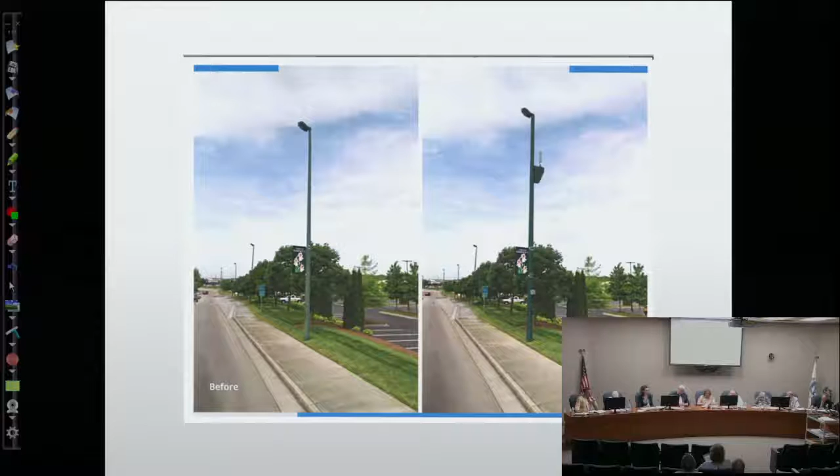Since the meeting, the application, as you may recall, was denied because it was incomplete. That was conveyed to the applicant, and they have provided supplemental information for the Parkside Drive location. This is roughly near the eastern access into the Best Buy shopping center on Parkside Drive, approximately where this is located.

There's a rendering up on the screen of what the pole looks like right now. It's a light pole, and they will be taking that down and replacing it, similar to what Zayo did a couple years ago with some poles on Parkside Drive and Campbell Station, or Campbell Lakes Drive, putting in their small cell structure and antenna.

About a third of the way down, you can see it on the right. The reason it has to protrude away from the pole is because the light is at the top.

The original design for their freestanding pole, which was going to be separate from our light pole, was a more stealth structure at the top of the pole, kind of a cylinder. It blended in and looked like just a pole without anything on it.

But we recommended they consolidate the poles out there because what they had proposed was just a few feet east of this light pole, and it would have had two large poles pretty close together. Staff felt it was more visually appealing to have an antenna that protrudes out, but only one pole instead of two poles in the general area.

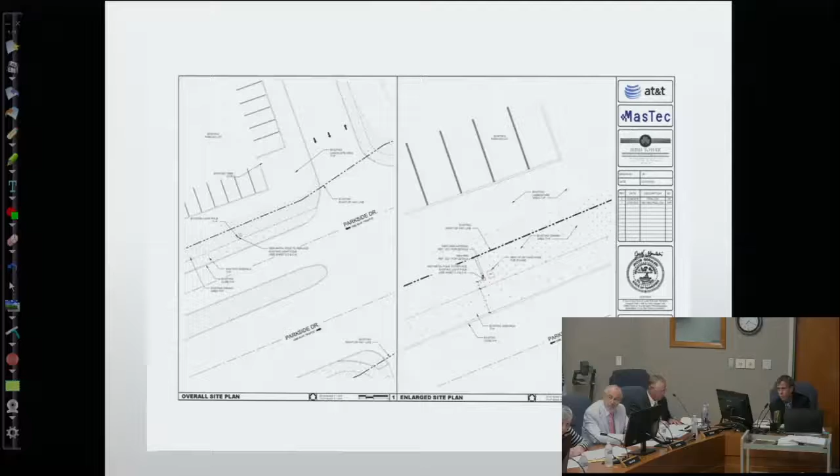They mentioned in communication back to you about the Heron Road location. Any more insight into what they're going to do there, or when? I haven't heard anything definitive yet.

They possibly will, if they have something, it could be out at Parkside Drive, kind of like we had originally recommended and asked them to consider, but until we see it, I don't really know for sure. And you don't have any kind of date? No, other than what I sent in that email, that's all I've received on that particular location.

So anyone interested in that can keep watch on the Farragut website for when that might come back again. Item number 8, discussion and public hearing on amendment to the C-1 mixed-use town center portion of the Farragut zoning ordinance as applied to drive-throughs, and—oh, I'm sorry.

Skip some. Yeah, I skipped one here. Yeah, I marked it off in a hurry.

Discussion and public hearing on a site plan for the drive-through lane and building exterior modification at the ORNL Federal Credit Union, 11405 Municipal Center Drive, 1 acre zone C-1, MUTC Design Collaborative applicant.

I'll let the applicant go through what they're requesting, but just to give you an overview, ORNL is updating their branches in the Knoxville region to reflect their new prototype, and this involves some exterior modifications, which is what's being presented to you all this evening. They also will have a lot of interior modifications that our codes guys will be reviewing.

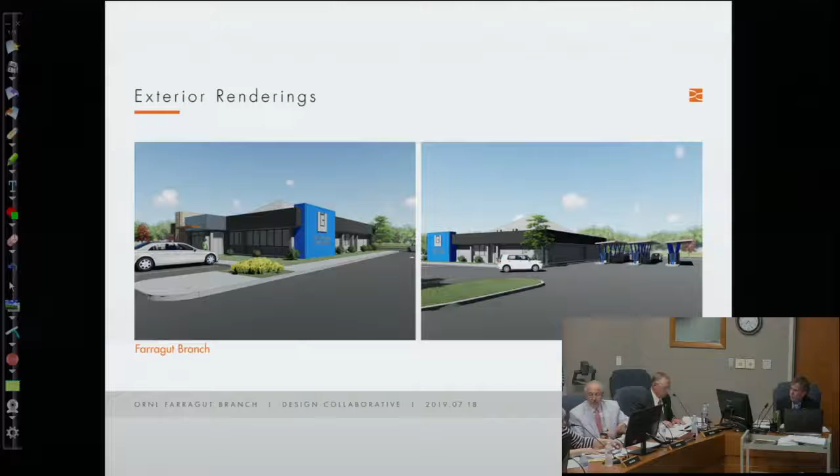That's just staff's recommendation on that. I think the applicant's probably trying to draw attention to it to a certain extent for the customers. Yeah, I feel like we're being overly restrictive when we don't need to be. We're trying to encourage business, and this feels like an unnecessary restriction to me.

The restriction is just on the drive-through, though. Yeah. And again, you really can't see it from anywhere unless you turn in, because there is shrubbery that blocks it out front. It is hidden fairly well from public streets. Yeah, definitely. Which is good.

That's surely a more muted color than what the picture is. Yeah, when you hold it up, that doesn't surprise me. It's darker. Noah, do you have any comments on it?

I think they have earned the right through grandfathering to continue the use of the drive-throughs. The blue is reflected on the drive-throughs as well as kind of an anchor point where their signage is proposed. I have a real heartburn over this due to the fact that this is our MUTC.

This is not something that we're approving on Outlet Drive or out on Kingston Pike and West Farragut. This was an area that we designated a number of years ago to try to set a tone, and we've held some other folks' feet to the fire within the MUTC regarding colors, both on some renovations over at West End Avenue as well as the new Starbucks. And quite frankly, I think with this particular building, we're going a little bit in the wrong direction. It does have some red brick.

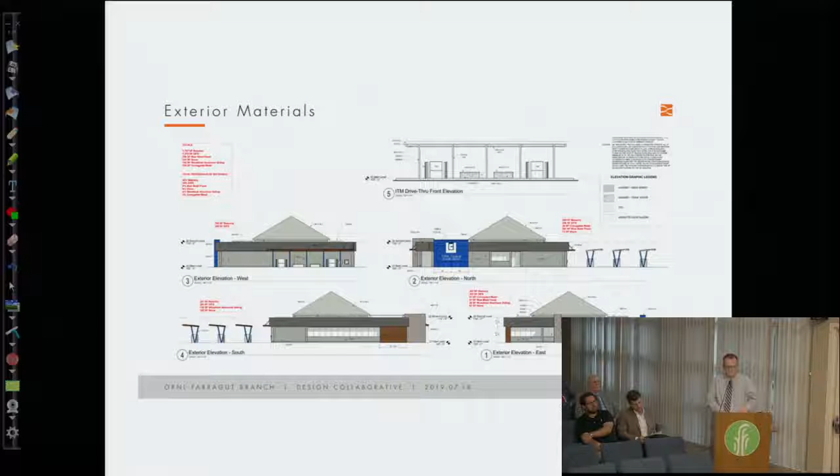And they're actually photos. Would it help if I turned the light off? It might help the audience too. No, it's hard for me to see that. Yeah, that's a lot better. Yeah, see more of that. It's a very bright blue. I mean, it really is.

Mark, do we have a blue in our architectural design that's more muted than that? Yeah, we have other choices. Are you aware of the colors we do have in our architectural design? Yes, and through discussions with Mark and a colleague of mine...

This is what ORNL Federal Credit Union has used. This is pretty much their corporate color, and it's very similar to one of the blues within the approved list of colors. So that's really why we're seeking to present this in front of you and have approval for using this color.

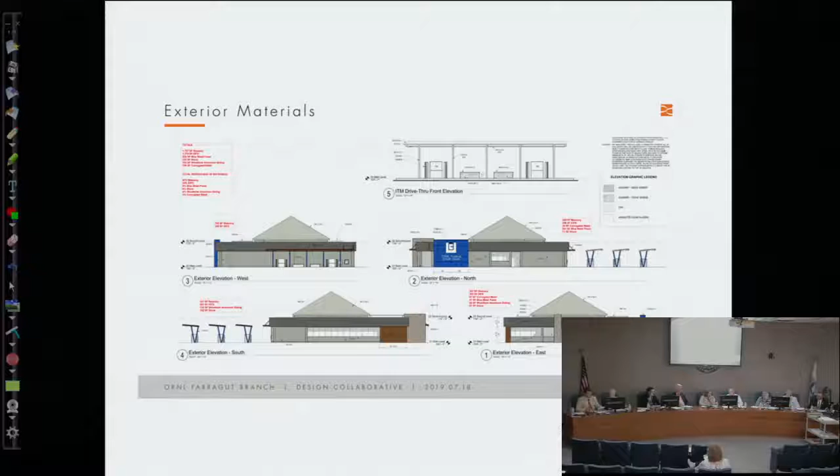By the way, the dialysis building has bright blue awnings. That's grandfathered in, well before we ever had the MUTC or the architectural design standards. I think this right elevation, the one shown here, is that facing south, facing Municipal Center Drive? Yep.

This is something this planning commission has struggled with, and I understand philosophically where everybody's coming from. If we have a problem with our architectural design standards, I think we should change it for everybody. Colors has been a big issue, and we can think back to some projects over the years that are the reason why we have the kind of color wheel we deal with today. My thought is we've got to be consistent going forward. This is a reputational thing the town has struggled with for many years, treating one developer or applicant one way and another way differently.

When this conversation started, Mark, I think I heard you say the opposition was to the blue on the drive-through because we did not want to accentuate drive-throughs. Now we're talking about the blue, period. I was talking about making all of it blue from the very beginning, not just the drive-throughs. Well, that's our prerogative to discuss it. I was just giving you the staff's position, because I think certainly drive-throughs should be de-emphasized in this part of the town. And I can agree with that, that's where I was coming from. The blue is pretty bright.

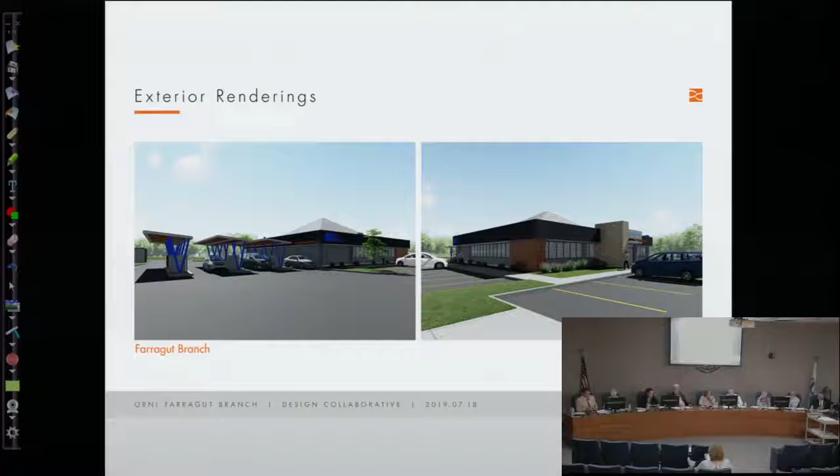I've seen it on actual sites, I did go out and look at a couple, and it's a bright, kind of glossy blue. I'm fine with the blue within their signage allowance. They have some blue on their sign now, they updated it a number of years ago, and within the allocation they have for their signage allowance, I'm fine with that. But to me, the whole blue block on the corner of this building is a sign, which is not within the allowance they would have for the number of square feet for a sign. It's out of character and definitely out of place for the MUTC.

I agree with Noah, we just can't make exceptions, and like Ed said, the next person that comes in, we have to uphold our ordinance. Well, maybe as a compromise, if you could box in the allocated sign area, you might get a fair amount of that square area that would be blue background, and it would be part of your sign.

Would they be eligible for the length of the building just on Municipal Center, but also the length of the building that faces the driveway? No, they would not take just the benefit of all the square footage. It would be based on the building width on which the sign is to be mounted, plus they could do the ground-mounted sign like they have.

I think there's some ways architecturally they could take that blue and create something where they define a picture frame within that box and then run their blue within that box. Obviously it's not going to be exactly what you're used to in your corporate identity, but what we're really hoping is that we can come up with a compromise that your board, your members, as well as the architect and other folks in charge, are happy with, as well as something reasonably consistent with our architectural design standards, the MUTC, and how we've treated applicants in the past, and hopefully we'll treat them the same in the future.

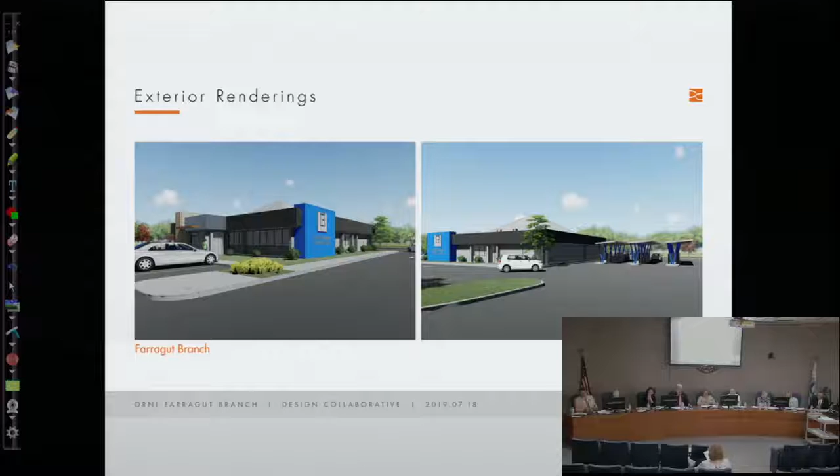So as mentioned before, with the pictures of the other locations that had multiple blue walls, we've really considered this location and some of your concerns beforehand, and reduced that quite a bit by having one wall, not nearly as large as other locations.

I think this is something they'd like to maintain to retain their corporate identity, but I think reducing the blue at the drive-through is something that can be done. Am I understanding you to say that you've already reduced the size of that on the wall? In comparison to other locations, as you saw in the pictures of already completed renovations.

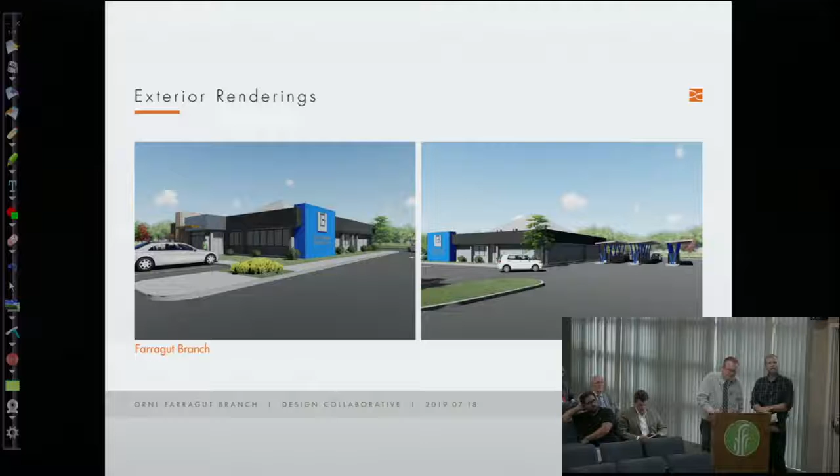Do that, Mark, if you can. Oh yeah, it is. It's smaller. I'm not sure how comparisons to other locations bring any bearing on our particular discussion.

I have to agree with that, Noah. I do too. If we can't come to consensus, I think we probably should postpone this until we can look at this a little bit closer and think of how a sign type thing would work at this location.

I might offer a compromise if the board as well as the staff would be comfortable with it. If it's possible that we could approve tonight, subject to working with staff and keeping your blue within your signage square footage allowance. That way, if you guys are trying to finish your plans and hopefully submit for a building permit, what we don't want to do is unnecessarily slow you down.

So if you felt like that was a possibility, I think that's something, at least myself, as long as the staff would feel comfortable with keeping your blue within your signage allowance, you could still do your blue background and then do your silver letters, the kind of laser CNC letters that you guys do on the front. You could still do that, and that's a way we could get you approved tonight.

I've not polled the rest of the commission here, but otherwise I cannot support it as presented. Yeah, I would encourage what you say, Ron. I guess my only concern from that is...

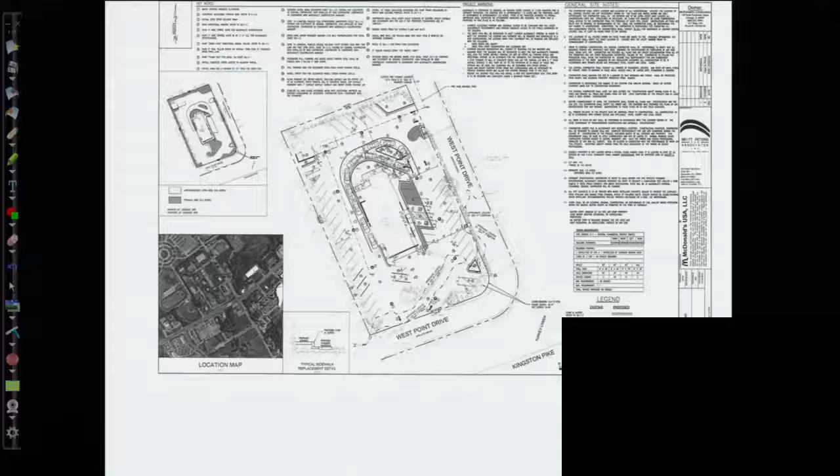Well, we talked about this item last month as a workshop, and as you know, McDonald's is getting ready to renovate their building on Kingston Pike, both internal and external renovations. And when they went back to corporate, they wanted to ask, for purposes of improving traffic flow within the rather confined site - it's a pretty small site, and it's much more fully developed than what we would allow under a completely new development.

So everything's really close together in there. And the thought process was to split the drive-through ordering point into two sections to reduce that stacking, because nowadays a vast majority of their customers use the drive-through rather than come into the building, and it was kind of the opposite when the building was built back in 1985. So they're trying to address that and really improve the safety of the flow internally on the site.

But in order to do those things, they had to request a text amendment because this is in the town center area as well - it's obviously an existing restaurant with a drive-through. So what we talked about last month was to make some changes to the C1 mixed-use town center to give the planning commission some opportunity to allow flexibility for these existing restaurants that have drive-throughs, where an applicant could demonstrate certain improvements as a result of what they were proposing as far as safety and general traffic flow.

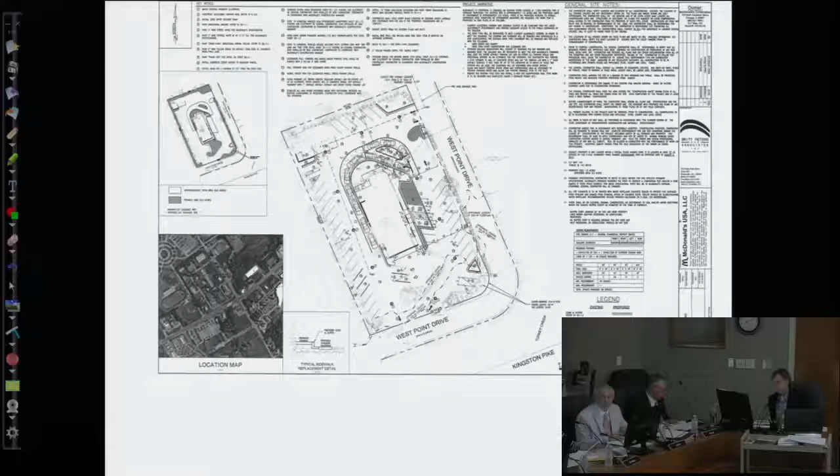I'd like to applaud McDonald's corporate as well as their local franchisee for taking some recommendations from this body and really exhibiting a willingness to cooperate as well as compromise on some really tough things we've dealt with. They've added some areas to mitigate the landscape beds being removed, added some landscape beds, and done a lot of things. We've been looking at this site plan since November or December of last year, and I want to thank McDonald's. I don't know if any representatives are here, but we appreciate your willingness to understand having an older building and trying to bring it more into compliance. We look forward to your continued success in the town, and I look forward to getting my unsweet iced tea every morning.

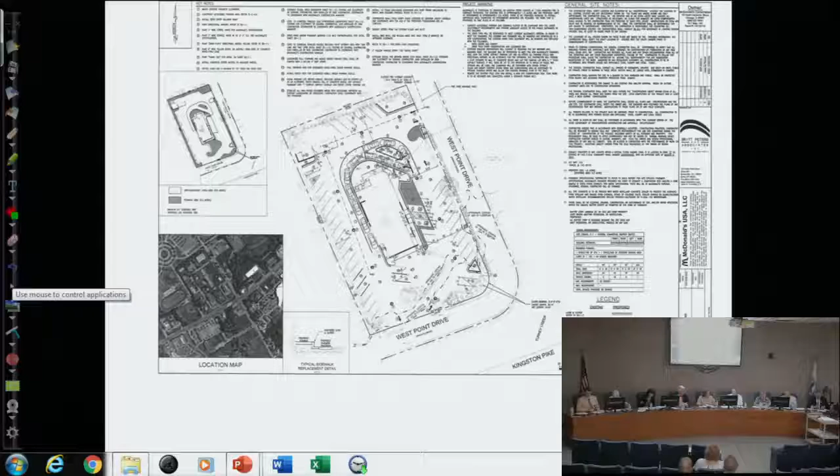I just need some help understanding a bit of this language. In section 1(7), the last line, it has to do with the square footage of the per ordering point, with no single board to exceed 20 square feet. Can you describe what that looks like, or show me a picture?

Remember they had the pre-order board, and then the order board. Basically, if you're going to do multiple boards, you have to make them a little smaller, or you could do one larger board up to 30 square feet. In their particular scenario, they wanted a pre-order board, which is the new McDonald's thing, so you can start looking at your options before you order. Through discussions we had last month, we felt that was a fair compromise. It also happened to work within the constraints of their corporate style size boards, which as I recall was a 10 square foot and a 20 square foot board.

So what are you calling an ordering point? Well, you've got the pre-order board, which is basically a big menu you get to look at, but you don't talk to anybody. And then you actually have your ordering point, where there's a speaker and a screen, and you tell them what you want. So the combination of those two cannot exceed 30 square feet.

Per lane, is that what we're saying? Per lane. So if you're approved for multiple lanes, you can have double boards, two boards for one lane and two boards for another lane. Two previews plus the ordering. But the sum of those two can't exceed 30 square feet per lane. Am I understanding correctly? Yes, per lane.

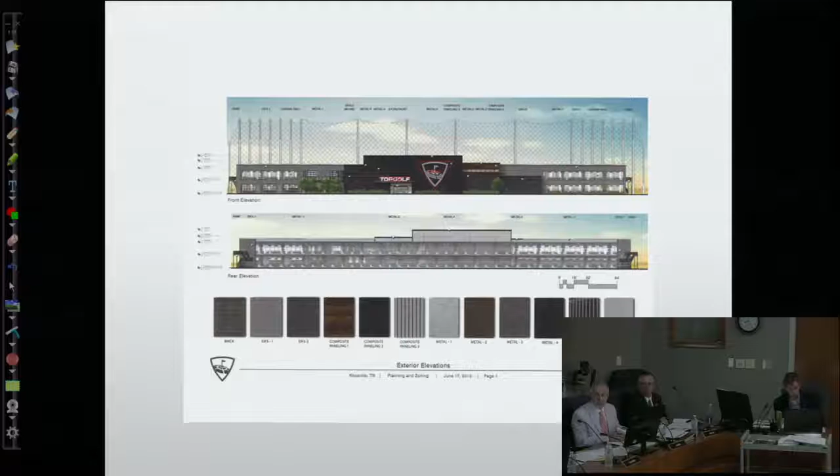If our intention is that buildings that are 2 stories and 25,000 square feet provide a minimum of 25%, we're actually saying buildings that exceed 2 stories, which would then mean 3 stories and above. So we may have a verbiage issue we can change to make that clear. If our intention is 2 stories, we need to spell that out. Maybe something like buildings that are at or exceed 2 stories and 25,000 square feet, is that okay?

That was the only change that I had from what was emailed to you all yesterday. Did you take out the last sentence, buildings shall otherwise comply with all provisions? What I put there was, and that was just a minor change, all buildings regardless of height and size shall comply with all provisions in the ADS. That way it's more clear as to what the intent was.

I'll be happy to answer any questions. Yeah, on 7E, I think we probably need to look at the verbiage there, the first 2 sentences. It says for a building in excess of 440,000 square feet and at least 1 building elevation of more than 400 feet. When I first read that, it sounded like we had a building with an elevation going to have a height of 400 feet.

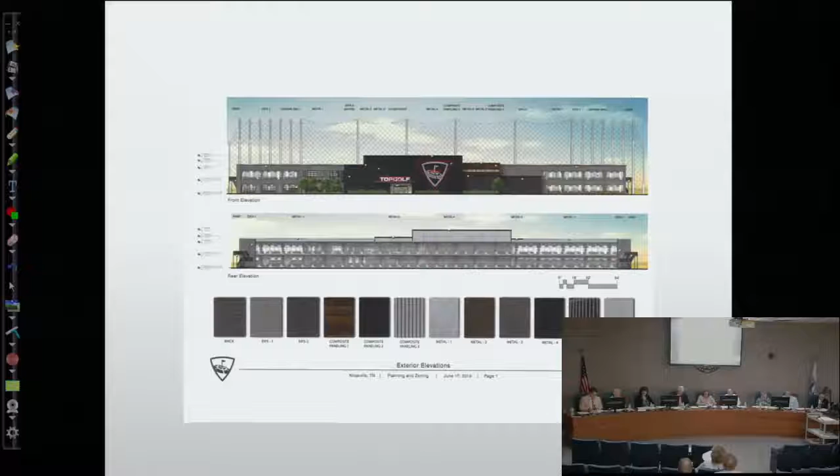On B8: 'Master sign' — should that read 'Master sign for a unified development is subject to the following development criteria'? I put in 'A' and 'is' — am I reading that correctly, with items A through J following? I kind of agree with Roseanne, I think grammatically that would sound more appropriate.

So add 'and' — I'm skipping over the parens — is it reading 'A' or 'eight'? Yeah, 'master sign for a unified development' — that's true, it'd be 'and.' Then you'd want to add the word 'is' — 'is subject to the following' — and then on A...

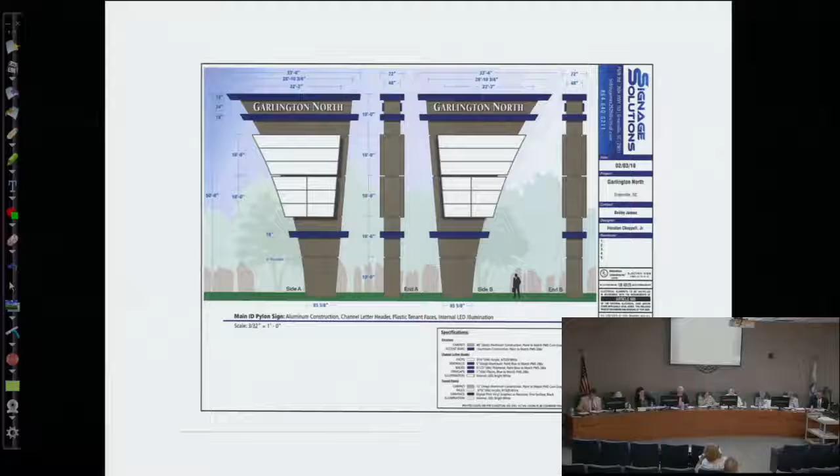Any other questions or comments on it? Okay, ready for a motion? I move for approval of resolution PC 1909, recommending approval of ordinance 1924. Second. With the amendments? As amended by all our changes that we discussed.

Roseanne. All those in favor? Aye. Oppose?

Moving on to item number 10, discussion and public hearing on amendment to the Farragut zoning map for parcels 154.06, 154.07, 154.08, 154.09, 154.10, 176.01, and 176.02, tax map 130, along the Outlet Drive corridor, from C-1 and C-2 and R-2 to OD-RE/E, approximately 36 acres, Realty Link applicant.

Okay, obviously this is related to the previous item. The applicant requested to rezone 7 parcels. All but one are currently zoned regional commercial C2. It is an area that we did update our future land use map just a few months ago.

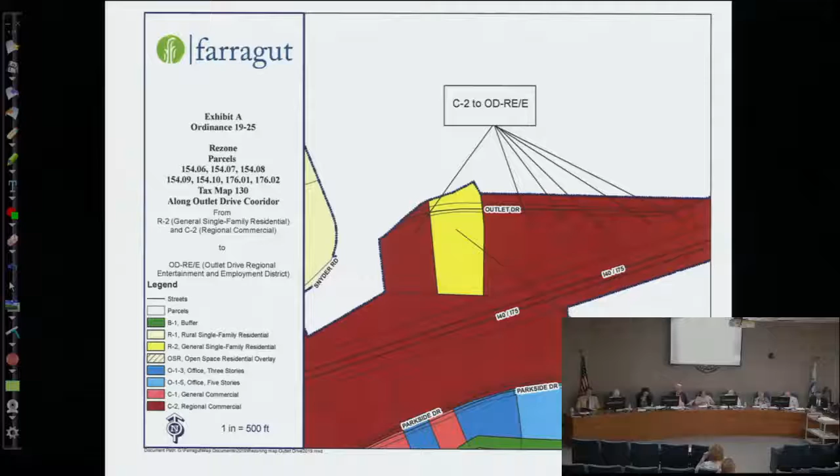The only property that's not already zoned regional commercial is that yellow property currently zoned R2, general single-family residential. It's pretty clear that that property is not likely to develop under R2. But much of that tract, and the reason it probably historically has not been rezoned to C2 is, at least based on the best available information we have right now, a pretty large portion of the property is consumed in sinkholes.

And so it's questionable as to how much, if any, of that property is really developable. You may be able to snake a road through there to connect to the property to the west, which also has some sinkholes, but not to the extent of this R2 property. The sinkholes, as you all know, we have a sinkhole ordinance, and obviously for very good reasons. There's a number of reasons that are provided for in the ordinance.

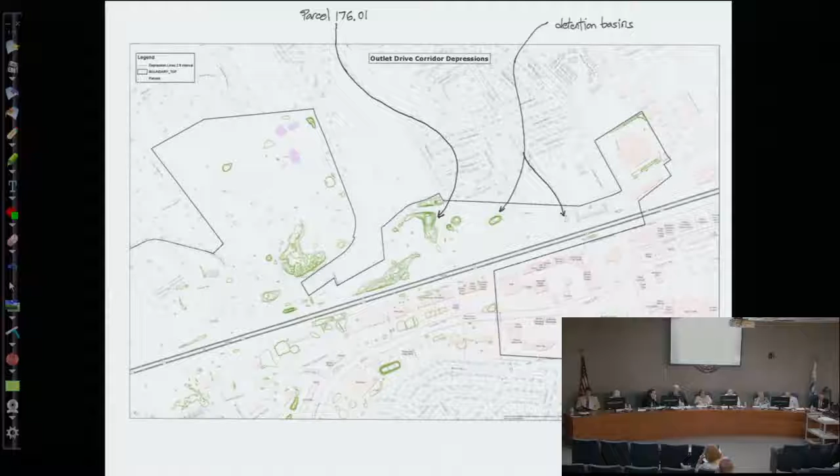That general area filters and drains a lot of the storm water, probably in the general watershed out there. So it already right now performs some very valuable functions. And so that's one of the reasons why it was shown on the future land use map, that portion of the Outlet Drive corridor, as open space.

That green area that kind of snakes around is intended to reflect the general location of either steep slopes, those that exceed 15%, or areas that, at least on the topographic map, are identified as sinkholes. So the staff is in support of rezoning the 6 parcels that are already zoned regional commercial to this new zoning district, but we do have to refer to the future land use map, at least at the staff level, when we make a recommendation on the R2 parcel, and we would not be able to support a rezoning of that at this time because it's inconsistent with the future land use map for that reason.

If you do choose to rezone it and include it with the rest of this district, it might be useful to have some stipulations or acknowledgement that the property appears to be severely limited as far as development potential, at least based on current information that we have.

Mark, my question is, if you leave it residential, R2, the setbacks that come with having a residential property with commercial around it, is that going to come into play? No, because the way I worded the text was it's property that's developed as residential, and that property is not developed as residential. It's zoned residential.

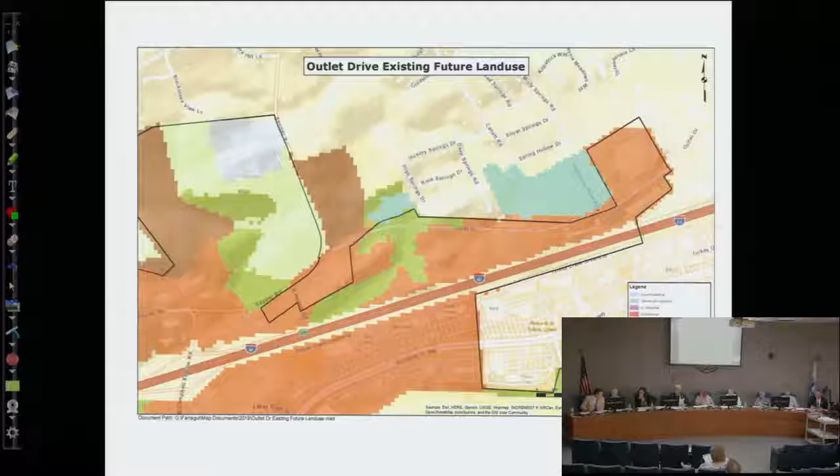But the reality is, if there is some developable property there outside of the sinkholes and the setback requirements, I'm okay with it. And that's fine. And leave this, not as residential, but included. Well, we'd go ahead and rezone it as the applicant has requested. I don't necessarily think there needs to be any additional language.

I think we're on the public record here tonight to say, hey, you may have some sinkholes, you're going to have to deal with this through TDEC or the Corps of Engineers and whatever else to determine the designation of what's a sinkhole and what's not. So I think we've already got that on the record. I think the reality is that I'm comfortable with approval of commercial zoning, that way it's consistent with the rest of the zoning, knowing good and well that they're still going to be subject to ordinances elsewhere that can protect those environmentally sensitive areas.

I'm fine with that, that sounds good. When you say commercial, are you saying they just go ahead and put it back into that parcel with the other 6? Yeah, what I'm talking about is go ahead and include it as part of this OD-RE zoning district.

I agree, R2. It's in the ordinance, it's all 7. It just means don't delete what you said you wanted to delete. So that would just be recommending approval as it was submitted, as written in our package, the 7 parcels into this new zoning district. Sounds good.

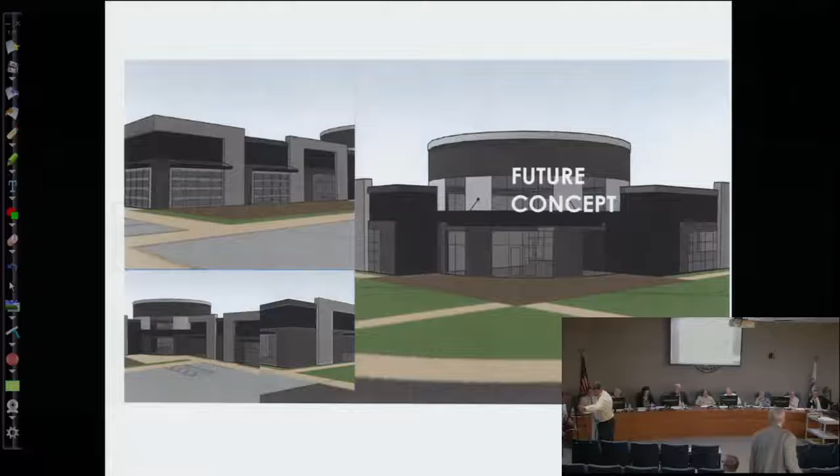Before I turn it over to the property owner, everybody's familiar with this property, obviously, Phillips 66. Generally, what they're wanting to do, this is kind of a rough idea of the building at this point at least. And this is a very preliminary site layout. It's pretty much a total of around 9,000 square feet of building space and a couple of fairly large outdoor patio areas, which are all highly recommended in our mixed-use town center, which this property is within.

They've also been trying to work with the property to the north to get access so people can get out of the property, in particular further north, back out of the stacking lanes at the intersection of Campbell Station and Kingston Pike. They're also trying to get an agreement for shared parking between the 2 parcels, which, for the restaurant type uses they're proposing, they are going to need a fair amount of parking. That would otherwise be very difficult to achieve for this project to make a go of it. So I think that's a good concept from the staff's perspective to utilize the land out there and hopefully get a development that would be beneficial to that corner in the mixed-use town center.

One of the concepts that is new to the area they're looking into is basically setting the building up so mobile food vendors could be brought in and rotated on different days of the week or times of the year. That's shown on the upper portion of the site, those 2 mobile vehicles. As you know, food trucks currently in the town are only allowed if they're part of an approved event. This is a little different too, because the trucks aren't sitting out on the parking lot—they're actually in a constructed space designed for that.

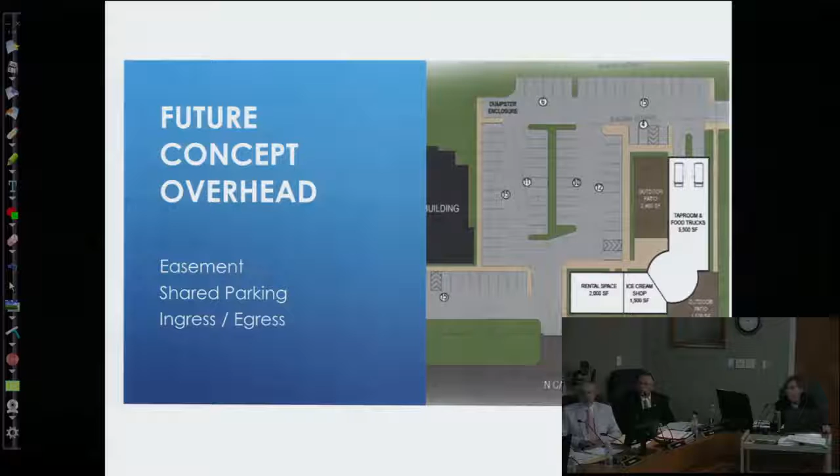So with that, I'll turn it over to the owner and architect, and they can walk through this project with you. Need to know who you all are and an address, all 3 please.

My name is Carlos Cortez. My address is 1523 Charlottesville Boulevard here in Knoxville, Farragut 37922. Doug Justice, 1721 Norbert Lane, Knoxville, 37922. Brian Nicholson, 305 Dominion Circle, Farragut. I'm an architect with Studio 4 Design.

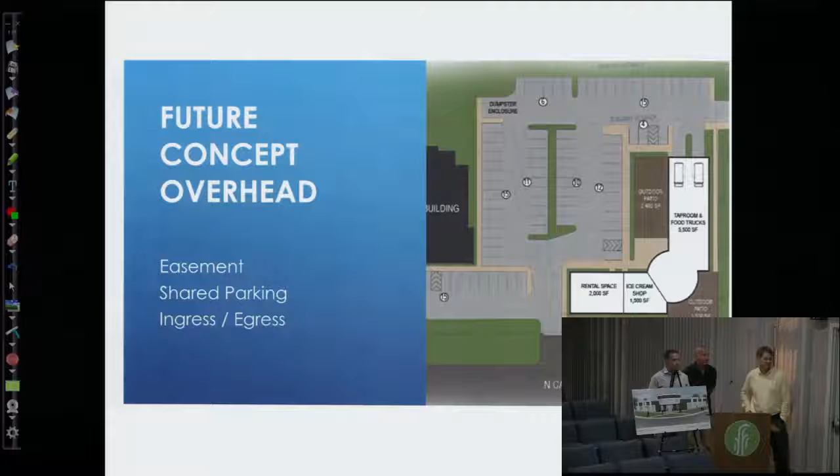Okay, first gentleman, you were Carlos. What was your function? Cortez, C-O-R-T-E-Z. We're owners, co-owners. Yeah, we're co-owners, we're both developers. Oh, okay, you own the land. So we're developing it together, 50/50.

Well, I'd like to jump in and be the first to say that I'm super excited about this. There's something I've experienced a lot on vacation that you guys may or may not have experienced down on 30A. There's an area called the Hub, in Seaside, and my family and I, when the Hub opened a number of years ago, I thought, man, we need something like this at home. You guys are kind of taking it to the next step by incorporating the food truck with it, and that's something this planning commission spent time on—we actually created a special group to study food trucks a number of years ago, when we really struggled with how to incorporate food trucks into the town and keep it safe so kids aren't running across parking lots and getting run over.

And this is unbelievably exciting, something that this body, as well as the staff and myself, we've thought about: how do we make the town of Farragut attractive to millennials? Because it is expensive, and quite frankly, the average age in the town of Farragut is about 11 years older than the rest of the average age in Knox County. So we're trying to figure out how do we do that. And this is one of the ways that we do it, that we create kind of a sense of downtown.

And I think it's a wonderful way. Obviously we've got to work through some of the details, because when it's new and exciting and innovative, there's going to be a lot of questions. But anyway, I'm ecstatic, and I hope you guys keep working, trudging forward on it, and don't give up, because I'm sure there'll be some little hurdles along the way. But it's a killer site, a gateway to our town, and what a wonderful way to be able to utilize that site.

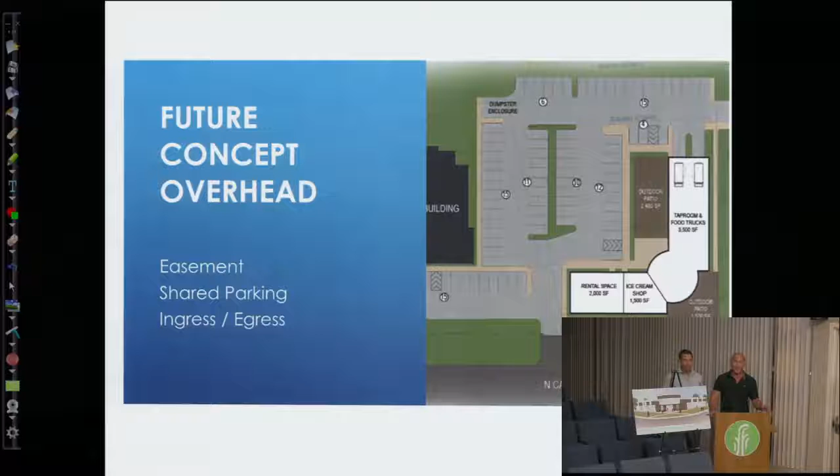One thing I want to point out is having rotating food trucks, rotating chefs if you will. You get the following of those trucks, so you bring people in from other areas of town. Someone that lives in Bearden following Johnny's taco truck will look on the Facebook page and come to Farragut. So you draw that younger crowd that will follow those trucks.

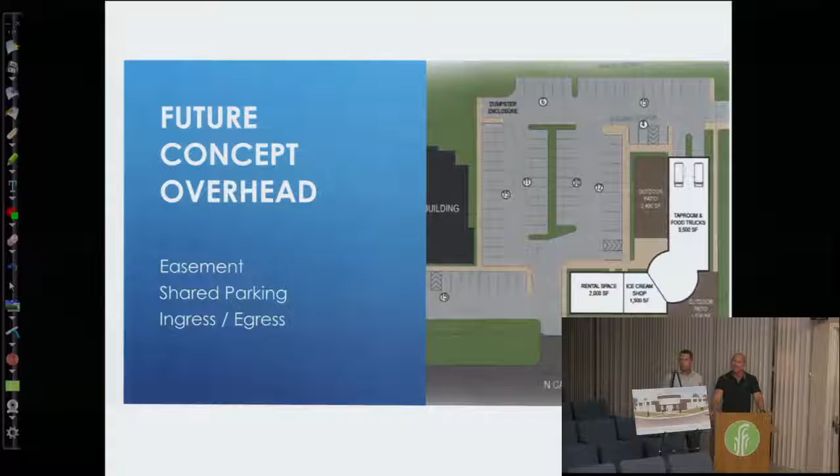Yeah, that's very true. I experience that on a daily basis where we work. We have rotating food trucks that come in, and there are people that come from all over town to our site for these food trucks. They're very excited about it because it gives them year-round operation, so they have a lot of demand for their food.

The ones that set up downtown, for example, what's the name of that? Central Filling Station? It's all outdoors, most of it. So if it's cold, if it's raining, it just doesn't work.

You're the developer, right? Yes, the two of you are developers. Yes, we are. Are you going to be leasing from Mr. Justice? I'm Doug Justice. Oh, you're Doug Justice. This is Carlos. They just didn't put his name on there. We're co-owners. Okay, so they would actually be the landlord. Yes, we're the landlords and developers.

So we'll develop it inside, and then actually develop the site and put the business in on the 3,500 square foot where the trucks are. We'll be leasing out the two spaces adjacent to it, which we hope to have someone like Cruze Farm or something like that follow. When we drive the traffic there, we've already spoken to them. I don't know if you guys have ice cream at Cruze Farm, but we're hoping to bring someone like that to help bring that traffic.

Any given night there's a line out the door during the summer at Cruze Farm down on Gay Street. It's great. That's downtown Knoxville, not the same downtown Knoxville it was 15 or 20 years ago. And the town of Farragut gets pretty quiet after hours.

I think this is a really cool way to try to do something. I think by having some tenants in there, year-round tenants, that'll really help your pro forma versus just relying on the food trucks. There's just a ton of great things. This solves some of the issues we struggled with for food trucks, trying to figure out where do people go to the bathroom and how do you deal with that, and how do you deal with the inclement weather.

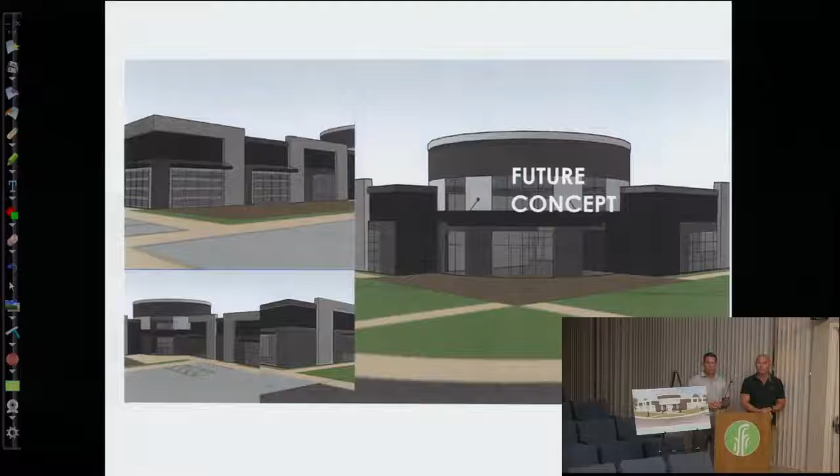As someone that for years bought their gas at the Phillips 66, are you going to be sad to see that building go? Yeah.

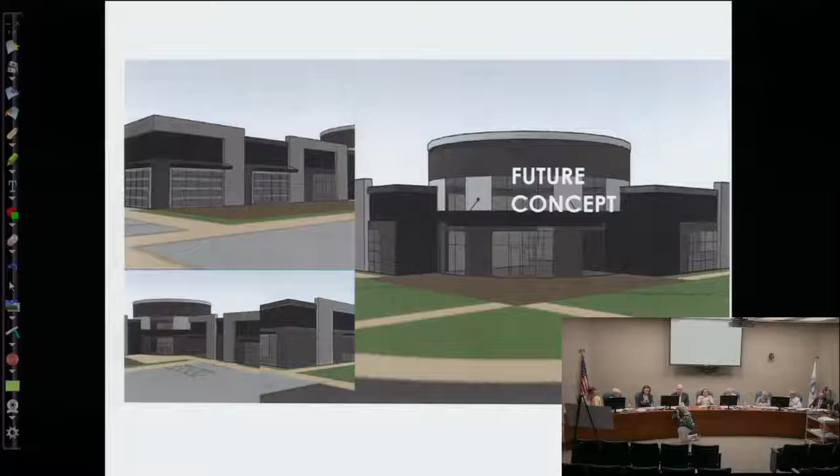A lot of my money went into that building, but I quit going because I couldn't get in and out. It was dangerous to try to stop and pull in from Kingston Pike, and there was no way I was going to try to pull out of there and go left onto Kingston Pike. Same thing coming east on Kingston Pike, turning onto Campbell Station and trying to get in. Fortunately, I never did, but I saw lots of people get rear-ended. So I'm very interested in how I can get in and out safely.

Well, I think the biggest thing is having that easement we're getting with the neighboring business, where you enter up by the fire hall and turn in there. You'll then be able to drive down, so it's not as hard. You're not in that hard corner when you turn in. So I think it benefits.

That's what we're working on with Mark and Tina. We're definitely willing to take whatever suggestions there are on that, like not letting anybody turn left out of that either way. We've already had preliminary meetings with Mark and with engineering and got some staff input on how they'd like to see those entrances and exits work, how egress would work through the site and be safe for the public, while still having good access and visibility for the business. I think we have a good idea of how to go with staff support and their direction.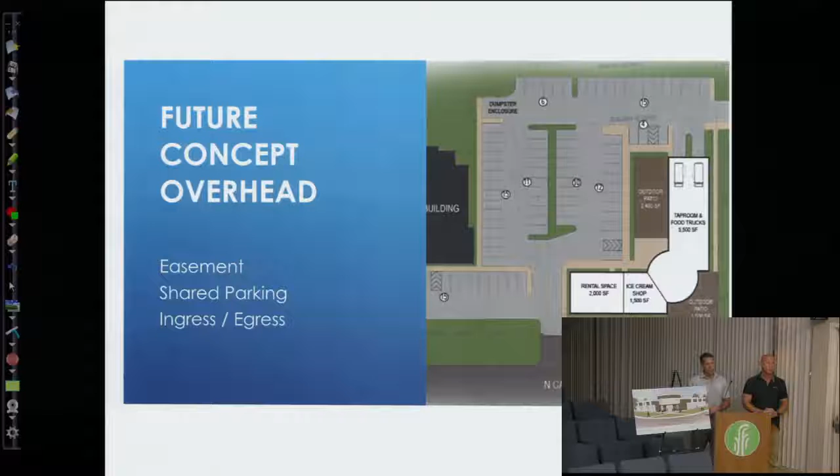Yeah, for the sales tax, I can understand as an alderman, the sales tax is a concern, but for me it was safety—how do we deal with safety in these parking lots? Because I've been to food trucks all over the country, and that's a challenge when they're just set up on the side of the street.

There's something that runs across the road here, and you definitely need the parking. So I would not say try to reduce your parking by any stretch of the imagination, because I think you're going to be busy. Just thinking of Cruze Farm and how busy they are, you're generating a lot of traffic, which is all good things.

Would you talk about whether you're getting some cooperation from your neighbor to the north? Absolutely, we're almost ready to sign. Okay, let me mention—there's a fly in the ointment that your civil engineer, or whatever consultant you're using for your design, may or may not have come up with. You're going to have a little bit of a challenge with that existing property line.

There's some setback minimums on that property line. The town of Farragut has dealt with other areas in town where you have property lines in a parking lot with separate owners. But there might want to be some discussions, because I'm looking at the aerial map of how to tie in.

And quite frankly, your peak times are going to be different than the medical office next door, which works out great—this really should be good for them. It should make their building a lot more valuable by generating traffic, so it'd be hard for me to think that they would be opposed to this. But there's going to be a challenge.

You've got three kind of dashed lines in there. It kind of looks like an easement. Really, that's probably a property line with some setbacks in it. Those are going to be some things that are going to be a little bit of a challenge for the town of Farragut to try to get their arms around—how do you deal with a property line in a shared parking lot with two different owners?

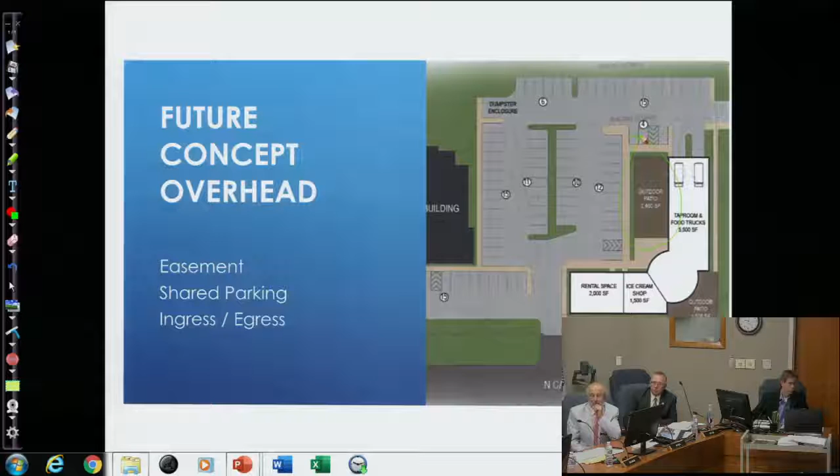I was confused because you got two kind of outdoor patios, what it's gonna look like. One of them is right there on the main street, on the main corner. Where I could see two outdoor patios being real handy is if you had live music on one patio, and you had somebody who just wanted to grab some ice cream or sip a beer and not have as much noise, you could be on the other patio.

Obviously, but the patio that's closest to the intersection, you may want to think about some ways to try to corral your pedestrian traffic out there, especially small children. All of a sudden they're licking their ice cream, and for some reason they want to take off and run out in the road. That'd be a terrible PR event for you, and horrible obviously for the child.

We're actually going to do that on the backside as well, so that way parents can feel free to let their kids kind of move about a little bit.

I like the idea of having the two patios, but you might think about there's a funny big box out there, I don't know if that's a traffic signal box or a utility box. Whoever's in charge of that box, you could figure out a way to either put a statue on it - I keep saying we put a statue of David Farragut on that box, pointing in two different directions. It is nice though, I agree for sure.

You could do a lot just with some low hedges or some landscaping, things like that with that patio. But I kind of like the idea of two patios. Well, not necessarily adult, but maybe you have one that's more of your party patio, which is a great location - you don't have any residential neighbors to worry about - and then you got maybe the other patio on the other side, which is also part of the iconic feature that everybody would see from the intersection.

Also inside, are you going to be serving on the inside? Serving beer - it says tap room and food, food trucks. You'll have inside seats as far as tables? Yeah, so indoor outdoor seating. There's some pictures in there of kind of concept drawings of what that inside tap room might look like, some places that we kind of going to use.

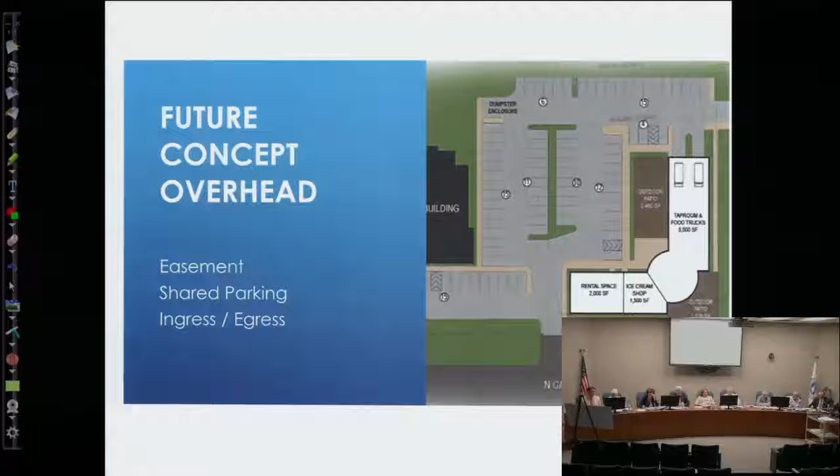Our market, Roseanne, I'll make you feel a little more comfortable. There's a beer bar that's a tenant of ours down at Renaissance, and their crowd is a family crowd, and those people will come in. Even when they have live music, it's a beer and wine bar, and it's not a honky tonk crowd. That's just not the Farragut market.